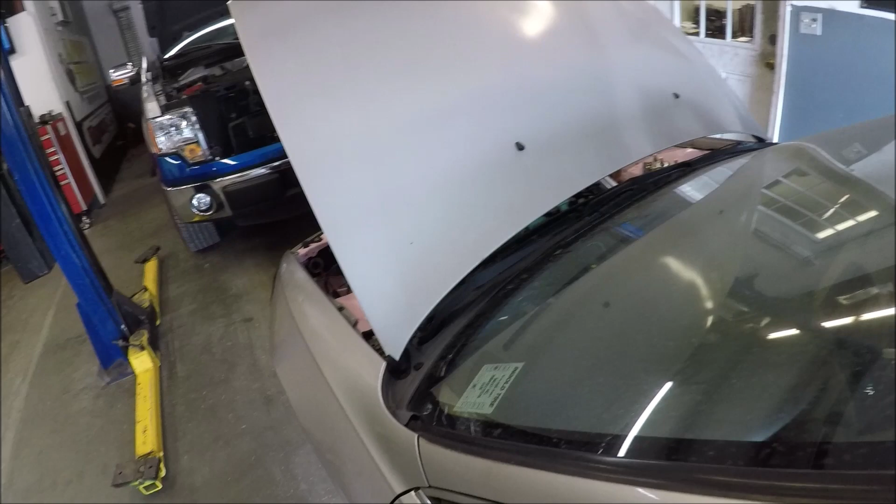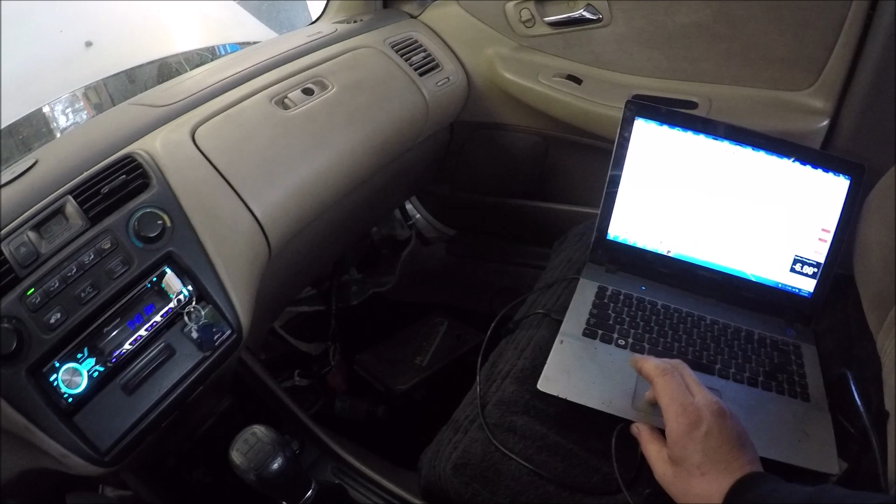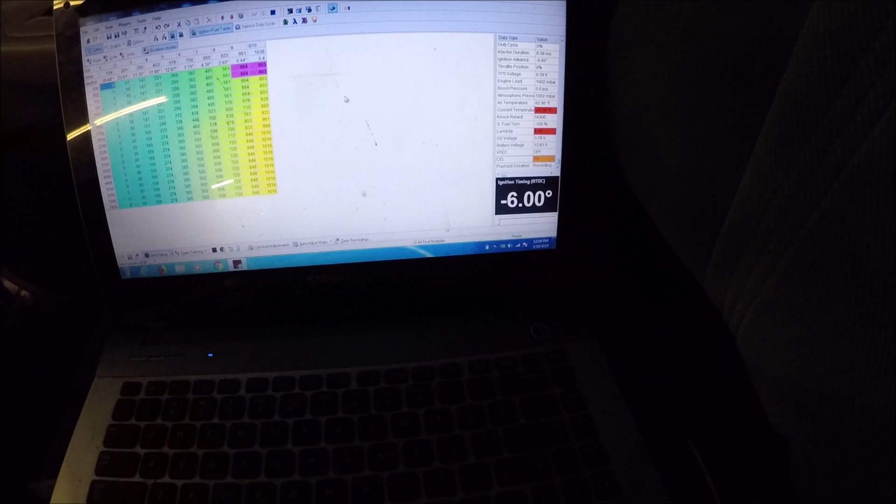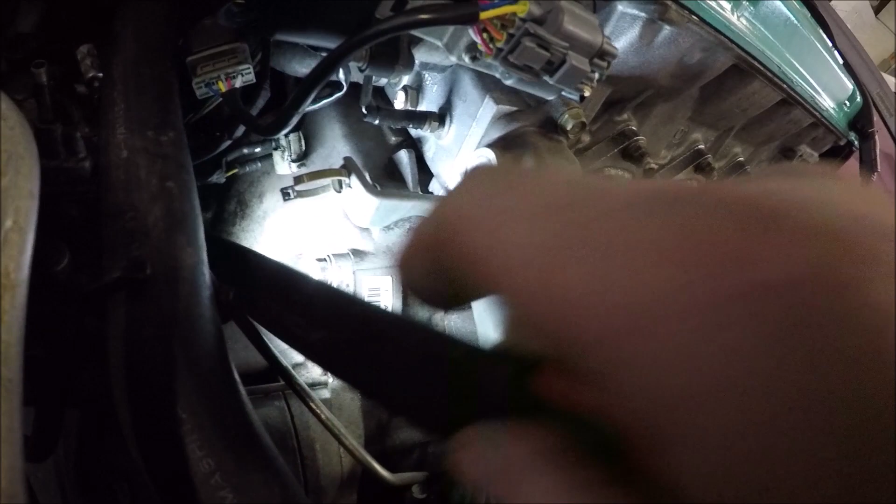Connected. All right, let's see what we have here. Engine coolant temp sensor. Let's go see what we got going on. I don't like hatches. I don't like the color, but I like the car itself. Flashlight. Get down in there. That would be our engine coolant temp sensor plug hanging right here, and that would be a broken engine coolant temperature sensor right there.

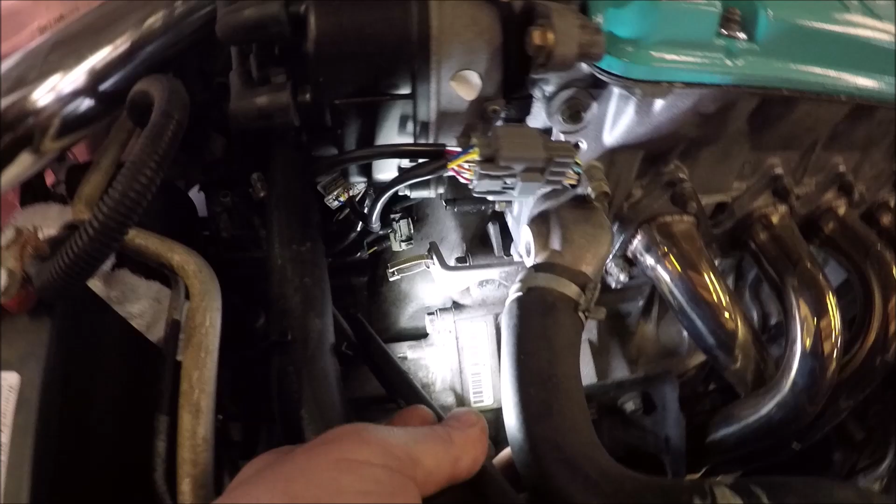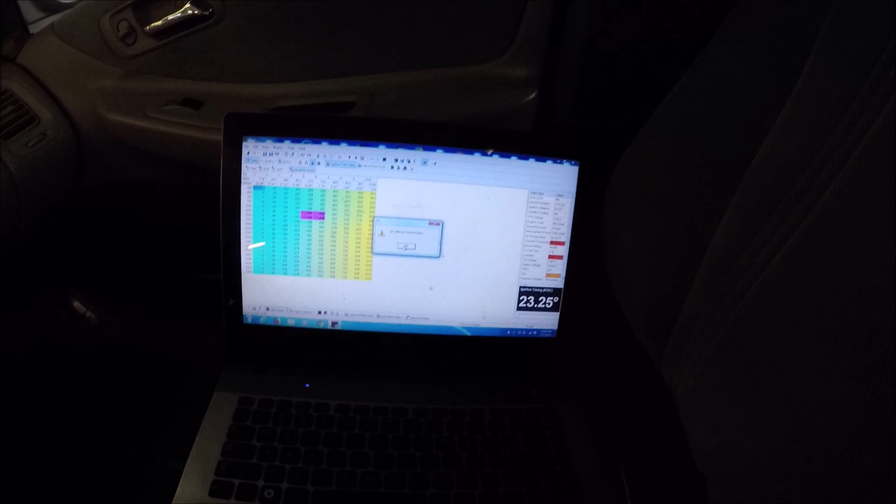Dang! All right, we gotta get this resolved before we can do any tuning, because there's no tuning solution for that. We need that sensor. That's why it runs like doo-doo. All right, so we got the ECT replaced, and now I got an idle air control valve code. It's because the one on the engine is 3-wire, and the P28 it's running on is looking for a 2-wire, so that's just not going to work. We're going to disable that and just roll with it. We'll be back.

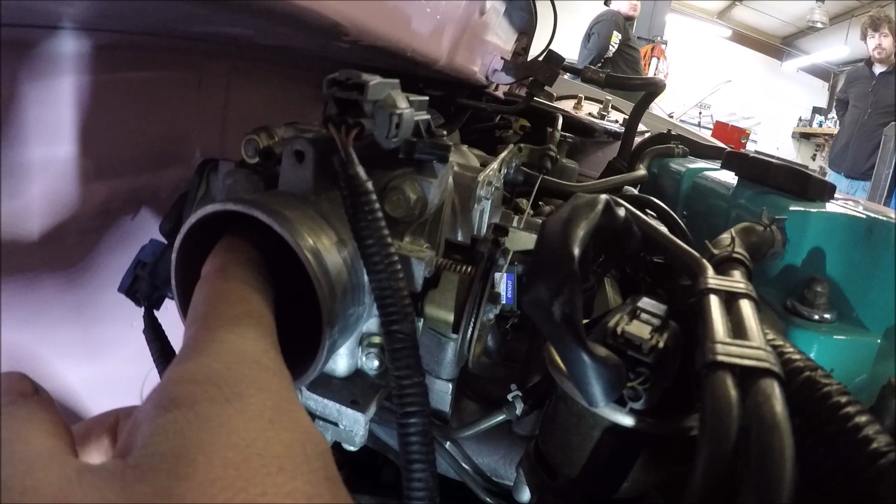Well, got the idle disabled, but we're gonna have to manually block off the idle air control valve or we'll never get rid of this. It's got an internal vacuum leak from where it's hung open, I guess. No more engine light though. See if we can't figure out this vacuum leak. Needs a tune.

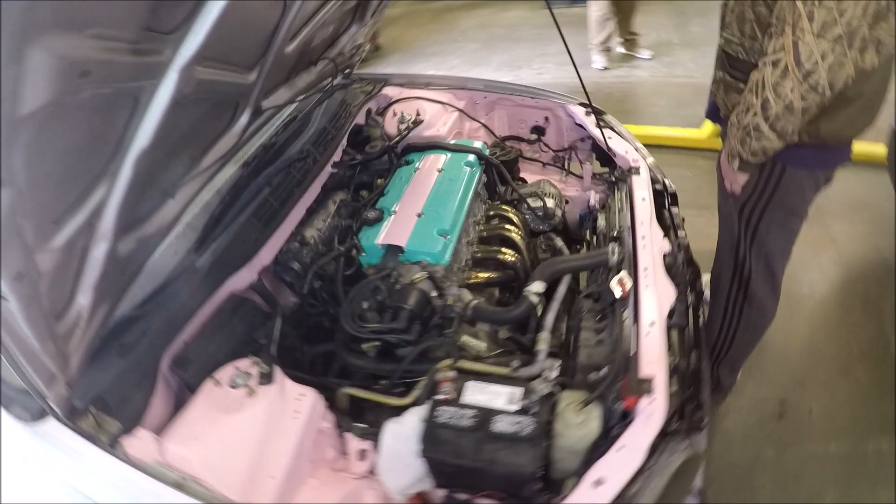Alright guys, like I said, this is not a tuning problem, this is a mechanical problem. There's no way to get through this with tuning and the push of buttons. What we have is an internal vacuum leak. The idle air control valve, which is back here, is leaking. It's stuck open. It's not wired correctly for this car. It won't wire correctly for this car right now. It's not really my job. I'm gonna tune it, so I'm gonna block it off with the gasket I made.

So the idle air control valve can't get air past the throttle plate, because that's what's giving us our leak. So we're gonna slide this gasket over it. I'm gonna clean it all up before I put it together, but that's pretty much the goal right there. We can bolt that on and our idle air control valve will not cause an internal leak anymore. I'll have to manually idle it up with the throttle plate. That's just what we're going to get in this case, so I can move forward and just get my job done.

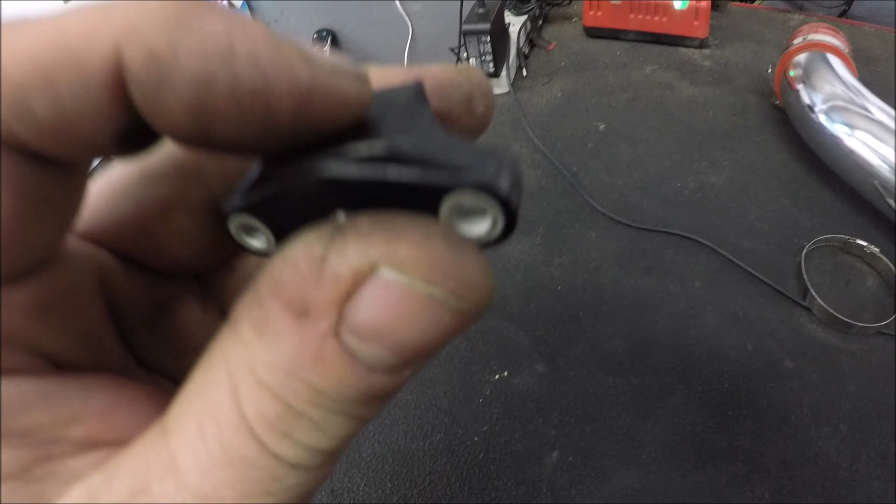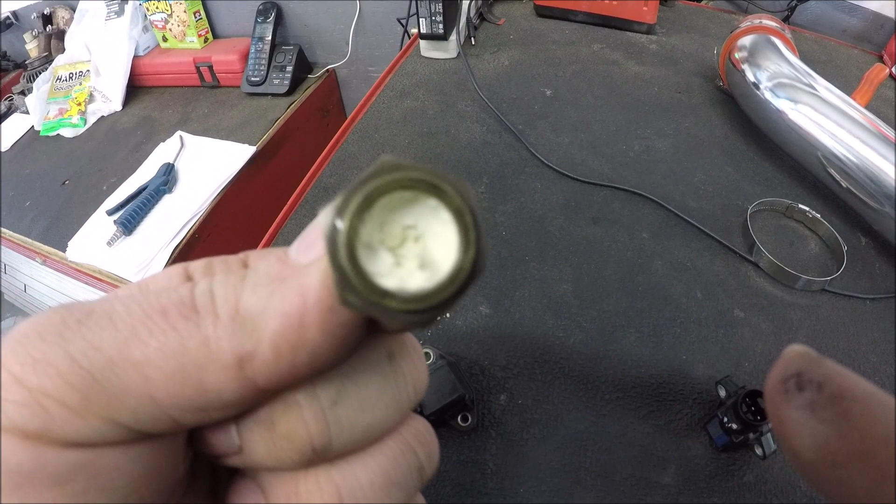Let's go. Alright, before installing the throttle body back on, I noticed the MAP sensor was cracked. Probably from the motor shipping, hitting it. Ain't no telling. She worked, but we're going to go ahead and resolve that with another good used one. Here's that ECT sensor that was in there to begin with. Broke clean off. All again from probably the motor shipping. But we're taking care of it and we'll be back when she's done.

Alright, so we're back together. I'm going to leave the intake tube off till I know we get it adjusted right, because we're probably going to manually have to idle it up. I haven't done so yet. Slight chance we don't have to do anything. I guarantee it won't idle. Foot on the gas.

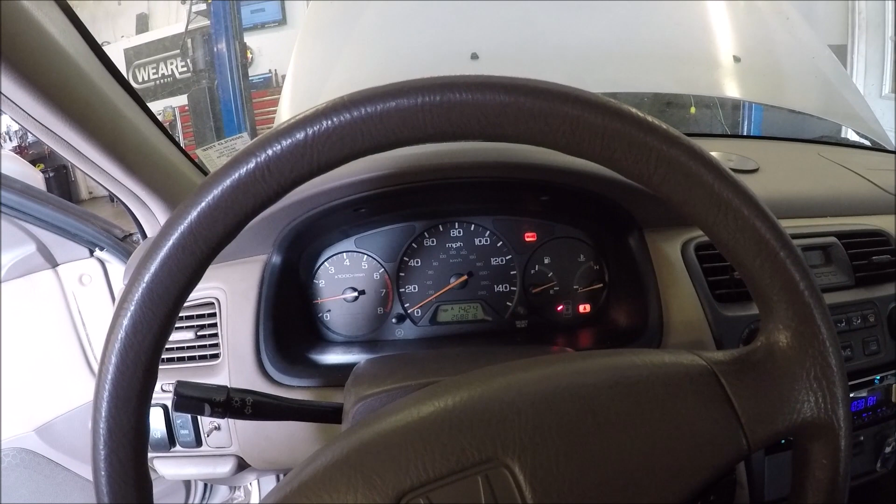That's me keeping it alive with my foot being steady on the throttle. So what we're going to do is just idle it up, set our TPS parameters to 0 and go from there. We'll move forward with the tune. They just won't have no idle air control functionality, but I'll be able to get the fuel and timing curves correct and we can move forward and be done.

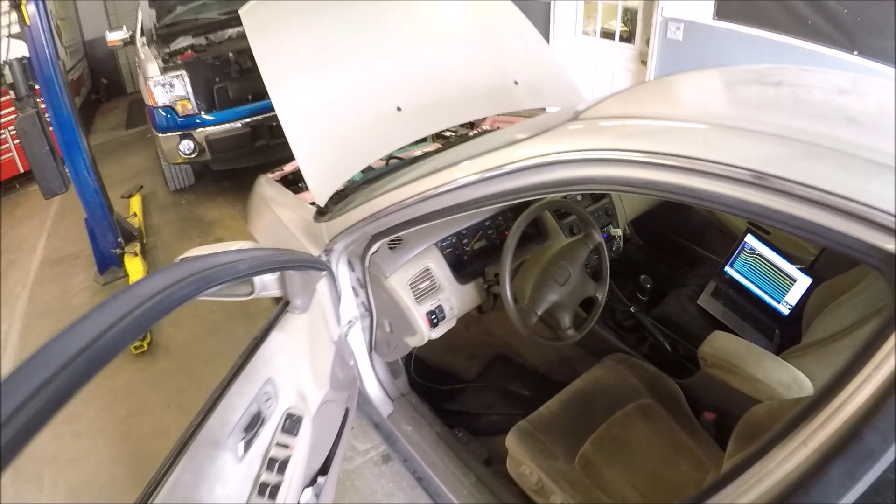We got our idle right where we want her. Let me get it with my hand down here. Look, she idles correctly, no engine light, responds like she should, returns the idle like it should. Now this is what a car that just needs a tune runs like. Now we just need a tune, minus the fact that we got to put part of the exhaust on.

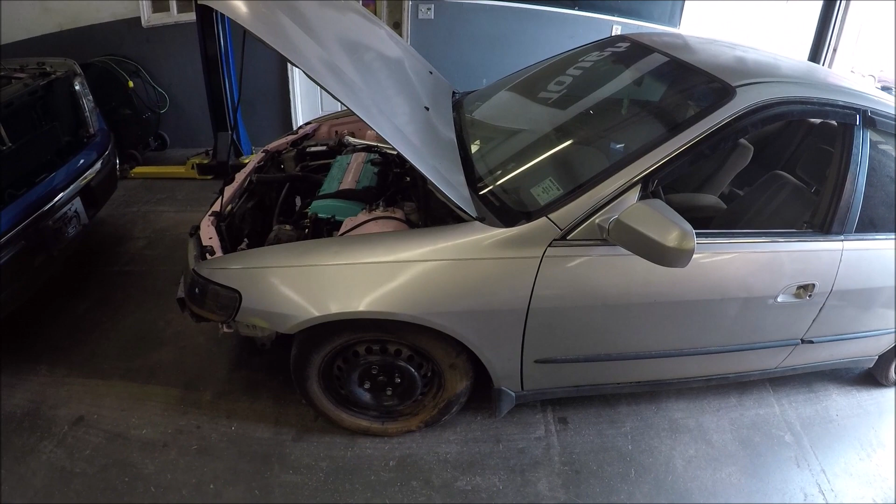Gonna help Anthony out here and get the exhaust on. Well, we already helped him out. I don't think he knew he had those issues, but we got to weld part of the exhaust, get it bolted up, and she's ready for a tune.

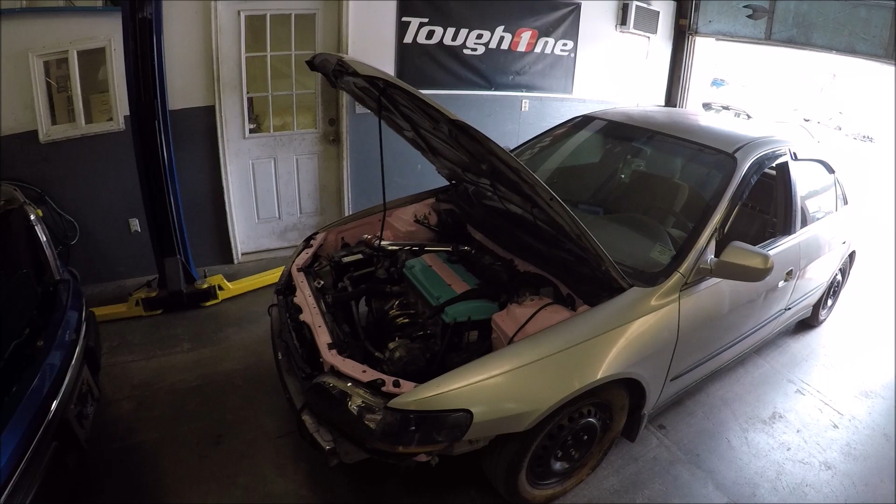But it's Sunday. I had to meet a customer up here, so I just used my time wisely while I was waiting on him and dealing with him. I've stayed over a little bit. He's come and gone, but I'm gonna utilize the rest of my Sunday for my time. So I'm gonna go home and return to this next week. We'll be back with it. Glad it's running much better though.

Monday morning, come in. I thought it was going to be a bolt-in ordeal on the exhaust, but had to weld her up. Quiet now. Idling good, no engine lights. Just gonna watch it, make sure the fans come and go like they're supposed to, and it don't overheat.

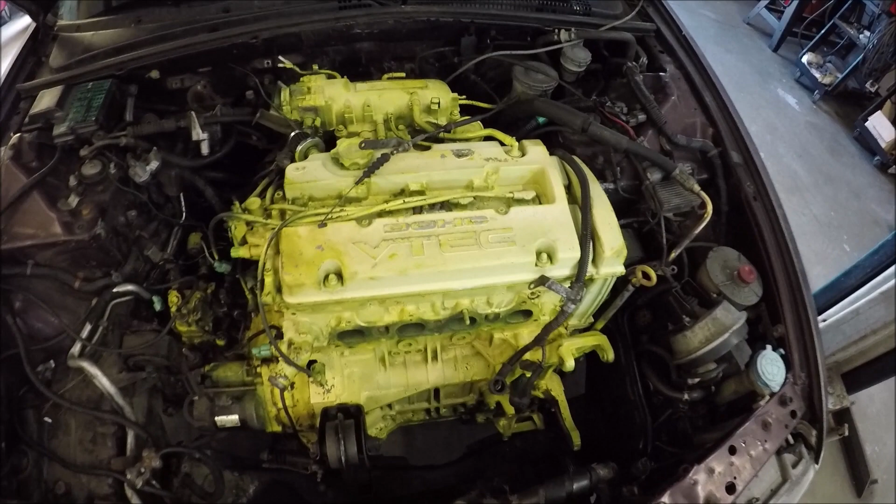Greg bought a new whip. Yeah. Y'all ain't ready for what's under the hood of this joint. This is the pride and joy. For all y'all Accord people, y'all know y'all wish y'all had this swap. Damn! That shit's hot. $500. For the hood prop.

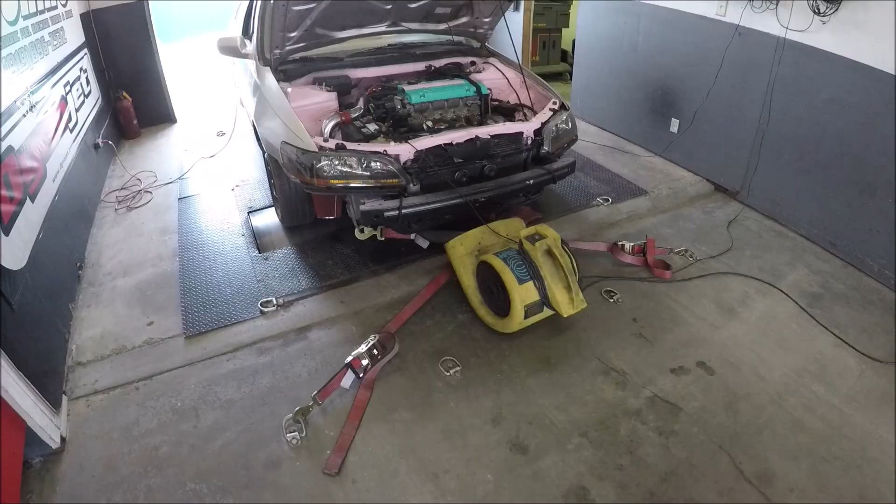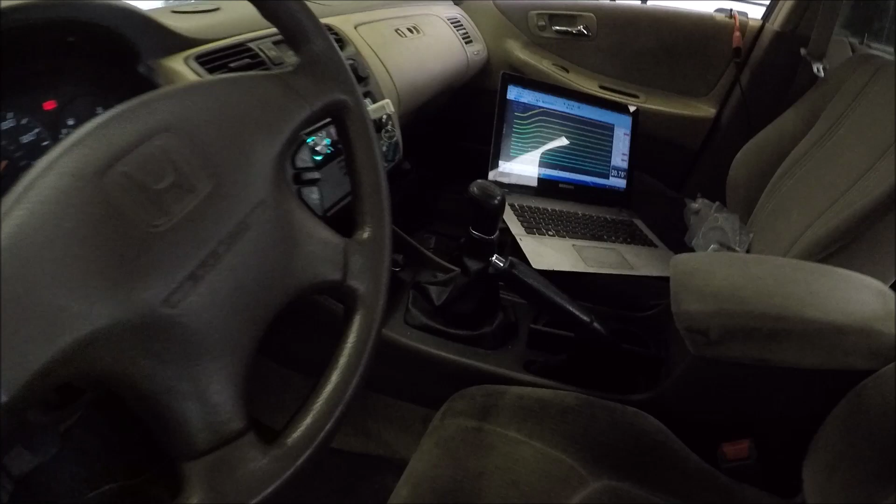Got Anthony up and running before I go get my youngin for school today. It's Monday afternoon now. Got her strapped down, idling good, no check engine lights, wide bands in. Let's give her a run through the gears to make sure everything's still sound. Haven't done that yet. Air fuels seem to be about 15 at idle.

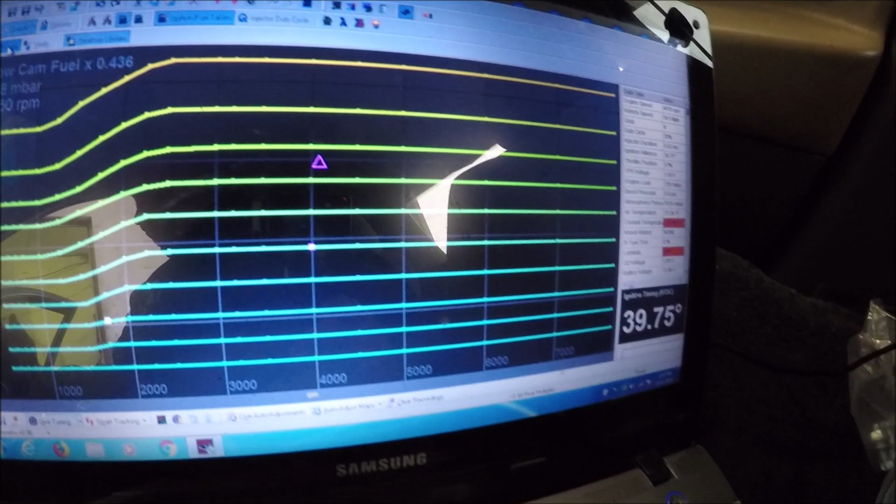Everything seems sound. Just get some heat in her before I go pick my youngin up down the road from school, and we'll come back and start tuning this thing.

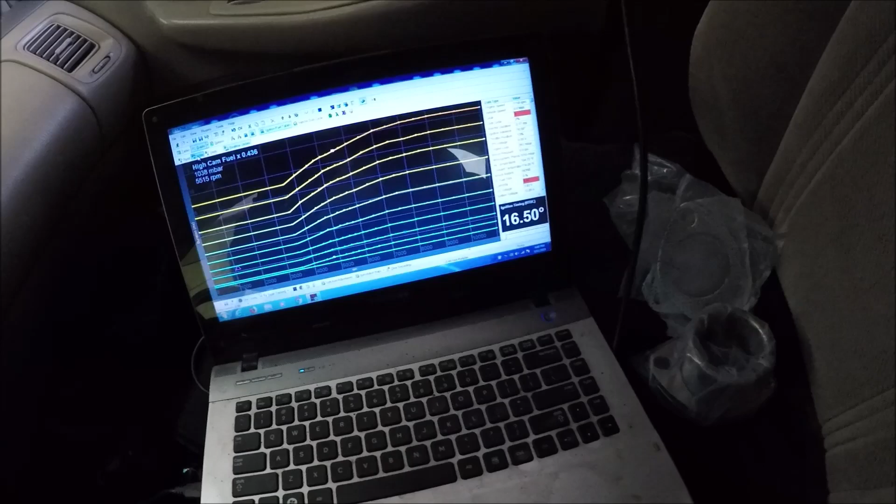And we're back with the 98 Accord with the pink engine bay. All right, think we're ready for a base pull. Let's get it cracking. Laid into it a little bit a minute ago. We are doing second gear pull on this thing first. It's got the Accord transmission with a F20B swap, and these gears are just so long. I'm gonna do the first pull in second. It'll get us a good idea where we need to be air fuel wise. And no, it's not 1-to-1. I'll save that for later.

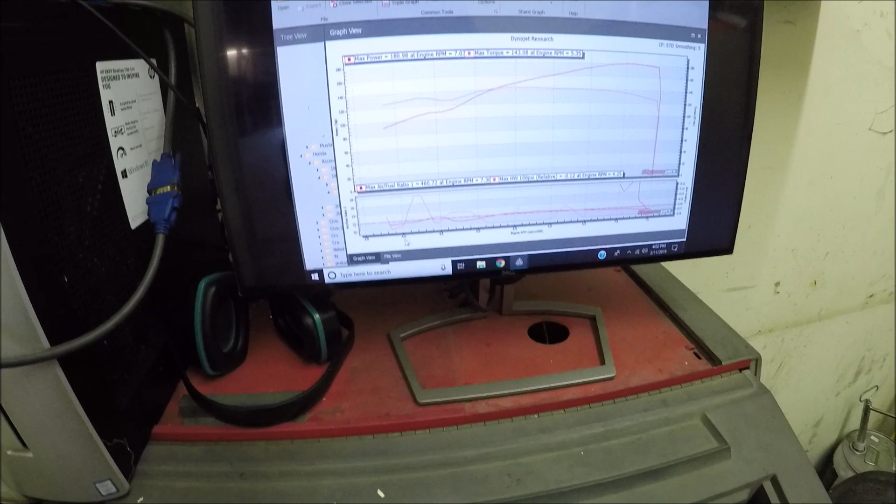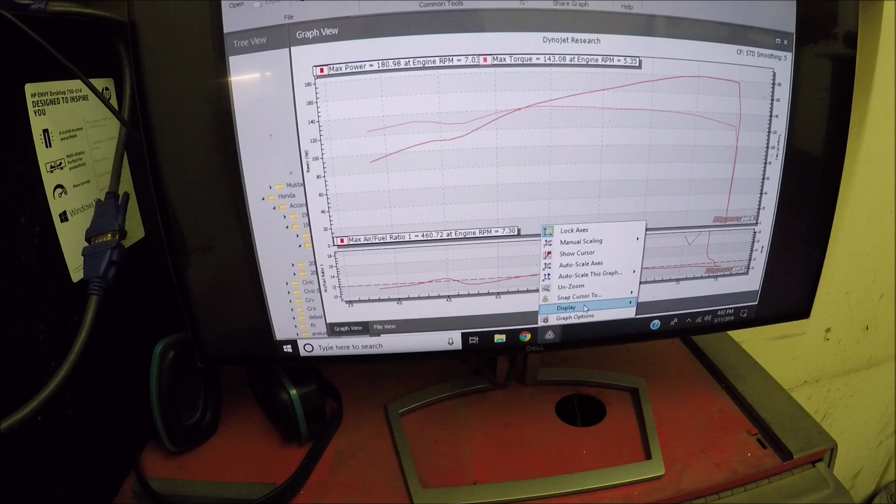Bit rich it appeared. See what we got. Ooh, 180. Air fuels were better than I assumed. Well, no, they were rich. That dotted line represents 12 air fuels. So we were rich all the way across. Bam! There we go. Get these air fuels right. Timing's where they normally like it. Looks like I need to set VTEC a little lower and lean it out. We'll be back.

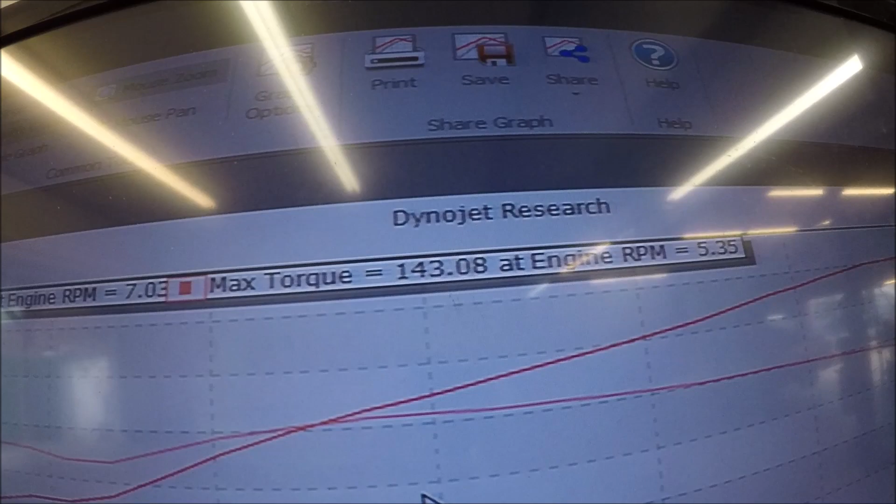Good first base pull. Just so you know, because I didn't mention it, 180 horsepower to the wheels and 143 for torque. And we are working with the F20B swap bolted to a factory LX Accord transmission. Not the best suited thing for it.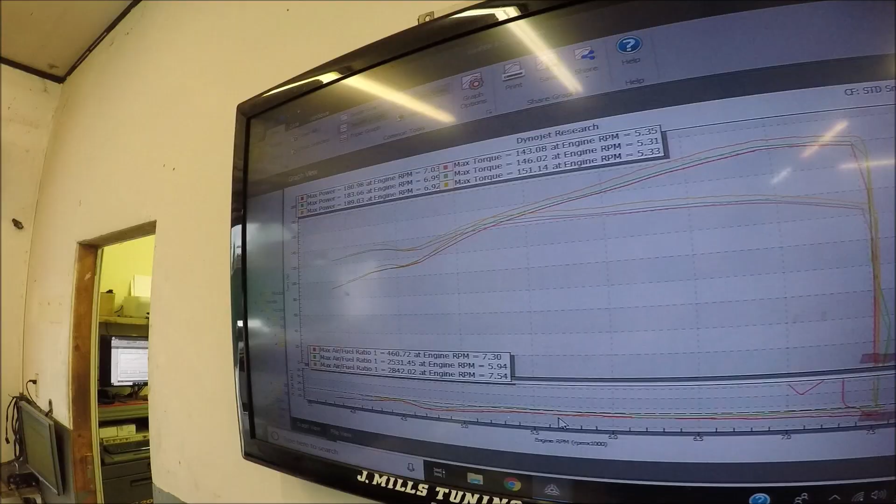All right, I think we're pretty much done here. I'm gonna go over part throttle, but I don't think that's anything y'all want to watch. We started with 180 for power, 143 for torque, and we ended up with 189 for power, 151 for torque. Not so bad with a little F20B bolted to a stock Accord transmission that's long geared as hell. Can't be mad at it.

That'll wrap this up. We're waiting for Dale to come pick it up. I'll leave it strapped on. Maybe he can get some video footage while it's still strapped down. But for now, she's done.

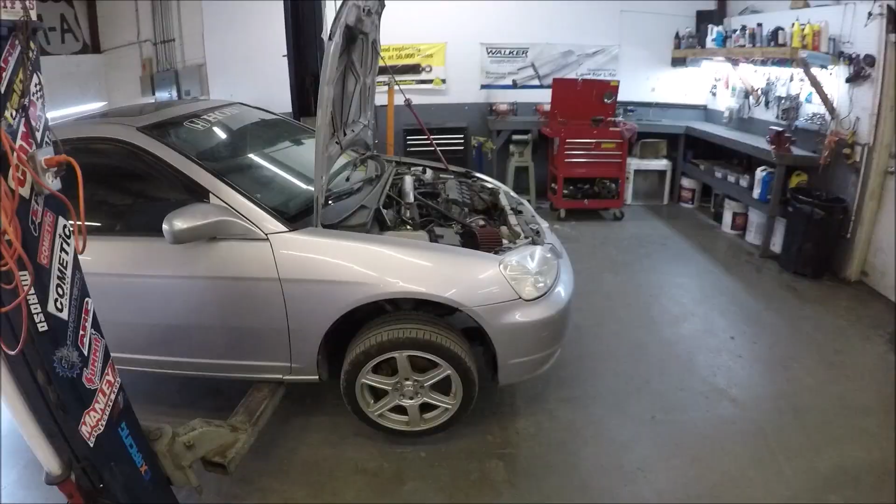Let's show you some of what's been going on around the shop. This just got pulled in today. Was dropped off sometime last week. Hasn't been driven in a while, hence the spider webs everywhere.

Who that guy? Who that?

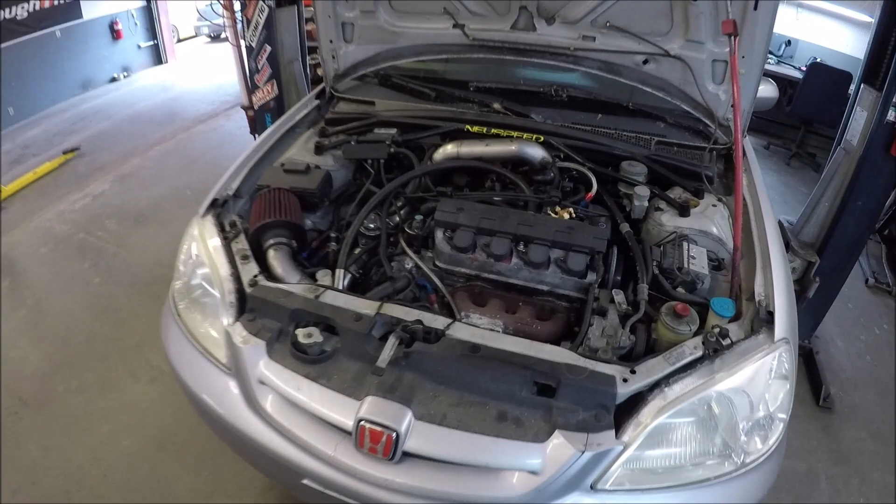Well, this turd, she blew up, rod knock, still runs and drives, just sounds really bad. So customer paid a deposit today for some parts. We're gonna build an engine for him, so you can have that little bitty motor that won't blow up. But no big power maker there. We'll tune that one on K-Pro when she's done.

Just got Anthony done, of course. This Mazdaspeed out here got dropped off, blown up motor replacement. The FRS, high pressure fuel pump, and the yellow S2000 out there. Y'all are used to that thing, but she's back, never left.

I broke the transmission on a test drive. We must have scrapped it already. I'm gonna show it to you. But customer came to pick it up. That's the turbo one, tuned on pump gas, made right at under 500.

Well, she broke the transmission on the test drive with the customer in the car, and now we're putting a Nissan 370Z transmission in it. So we're doing the swap with the Inline Pro parts. But it's gonna be it. I'm gonna wait for Dale to get here, and after he picks up, I'm going home.

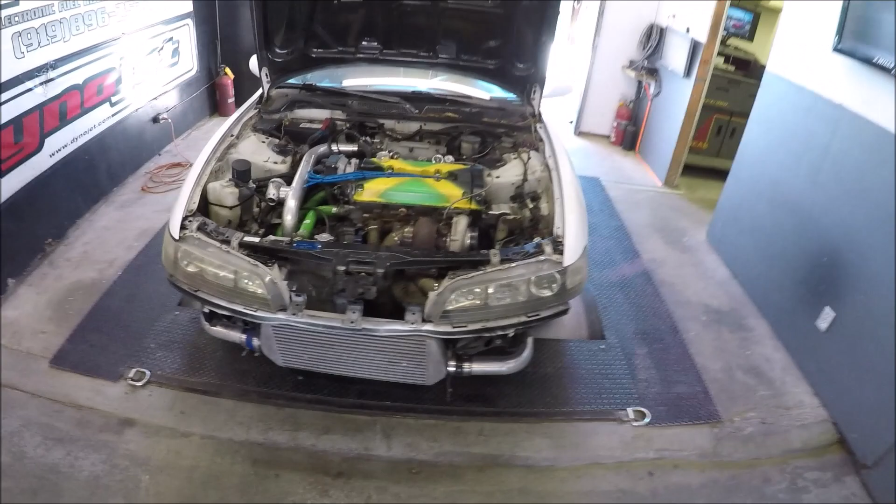Got this 95 Integra in with an LS-VTEC, stock sleeves. See what we can do on pump gas. Looking for the mid to high 400s. See what we can get. Strap her down. She's unstrapped right now. Let's get her strapped and loaded.

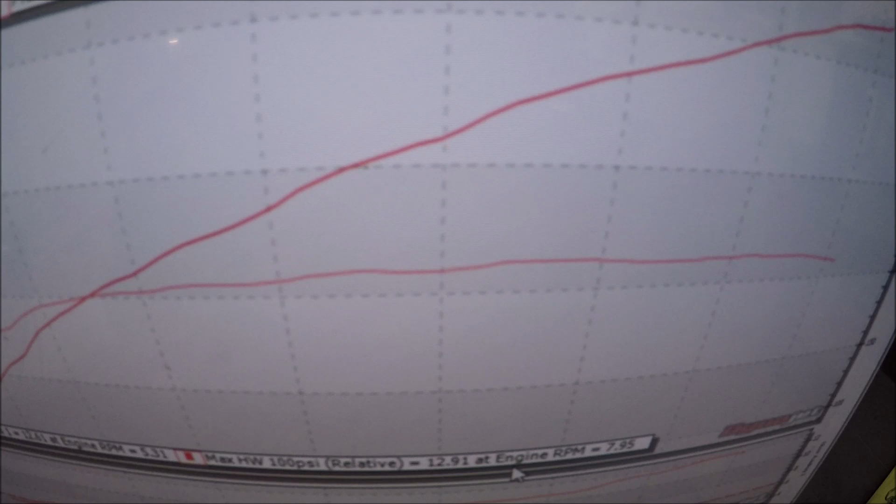Alrighty, here is our base pull. Base pull, 320 horsepower, 212 foot-pounds of torque. Nice clean graph. Air fuels are good. We turned the boost controller on this time. I'm gonna give her a go with the boost turned up. See what happens. I don't know what it's gonna hit.

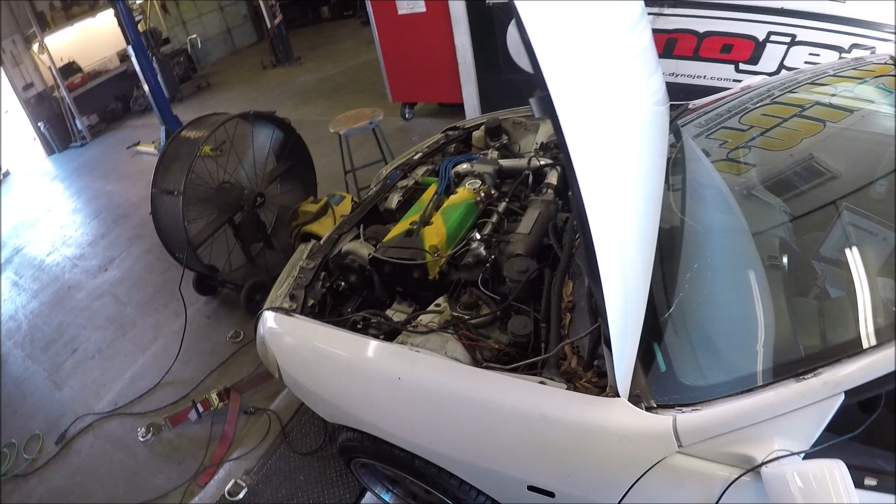Got it on 35% duty cycle. Don't even know if it's wired right, so we'll find out a lot on this pull. Is the boost controller wired properly? Is it going to work properly? We'll see.

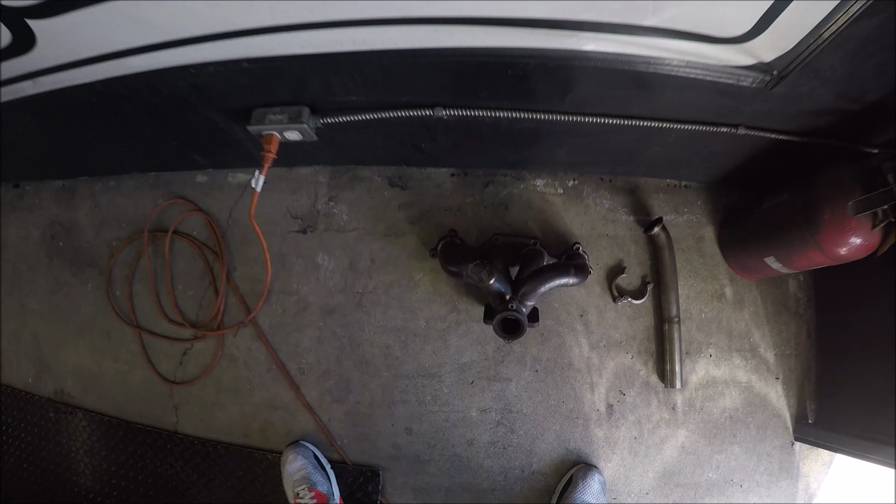Making some jam. Boost controller worked. Little recap on this thing that I didn't tell y'all earlier. It originally came in yesterday, Saturday, for a tune. Today's Sunday. It had this CP mini ram on it, or short ram. Put this in the light. That's what we were working with. We had lots of boost creep, really uncontrollable. Today, we still have some boost creep.

We swapped it out for the customer's top mount he had. He just wasn't prepared to do a down pipe and fix the charge piping for it, but I got that going yesterday afternoon. We still have some creep. Not as bad as yesterday. We can actually tune this. We're gonna live with it. We're just gonna roll with it.

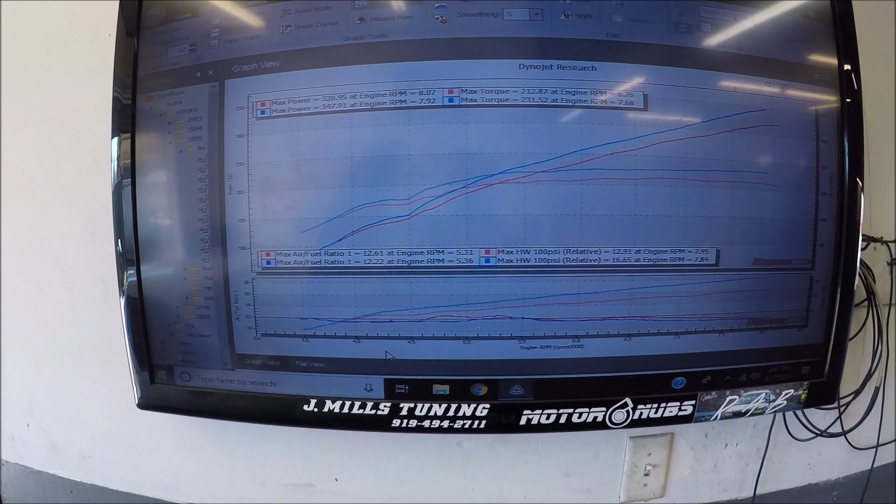Just a couple things that I think might be suspect. You could have a leak from the blow-off valve over there causing boost to not hit full boost as early. There just could be other things going on, but we're gonna roll with it. It's making really good power. It's safe. Air fuels were good.

We're gonna turn the boost up some more and take some fuel out on the big end and turn it more RPMs because it looks like it wants it. See what happens.

We either hit boost cut or lost the charge piping. Something happened, fell on its face. There we go. I'll fix that and be back.

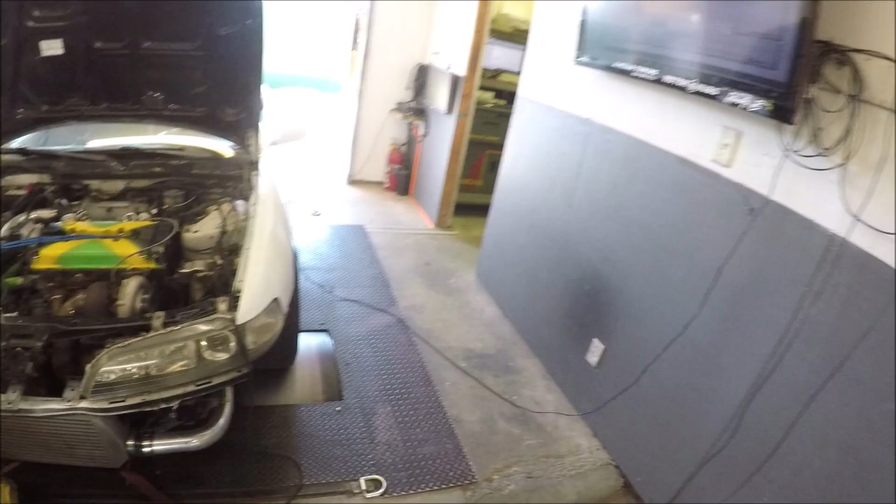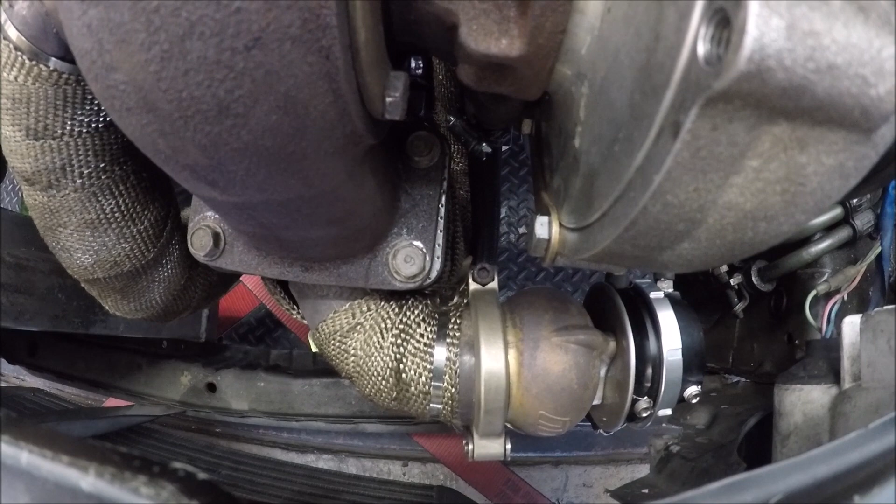Alright, like I said, we went from the CP mini ram to whatever this top mount is. I'm not sure. The mini ram originally had a 2-bolt 38mm gate. Creep was really uncontrollable just on gate pressure. No boost controller even hooked up. I couldn't control it. The more RPMs you give it, the more boost it'd make. This kind of levels off eventually, but gate placement is not the best. As you see, that gate could be placed better.

Why is that 90 there? We have all this room, man, all this room for a gate right here. And over here. Why is this 90 here? Well, in my opinion, this manifold would flow better if there was a piece of pipe angled in there at a 45-degree angle with the gate coming kind of upwards. It'd get some flow into it. Reason I'm saying this, we still have boost creep, and I figured the more the boost went up, the better it would get. It did. It leveled off here finally.

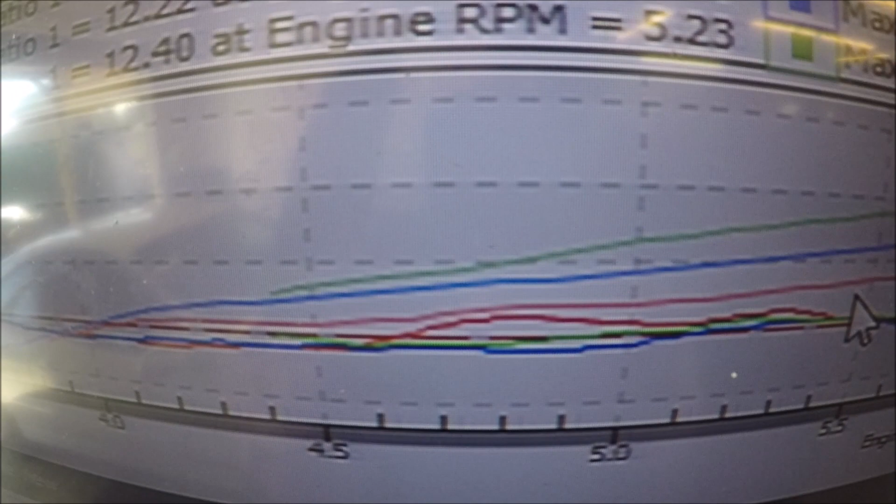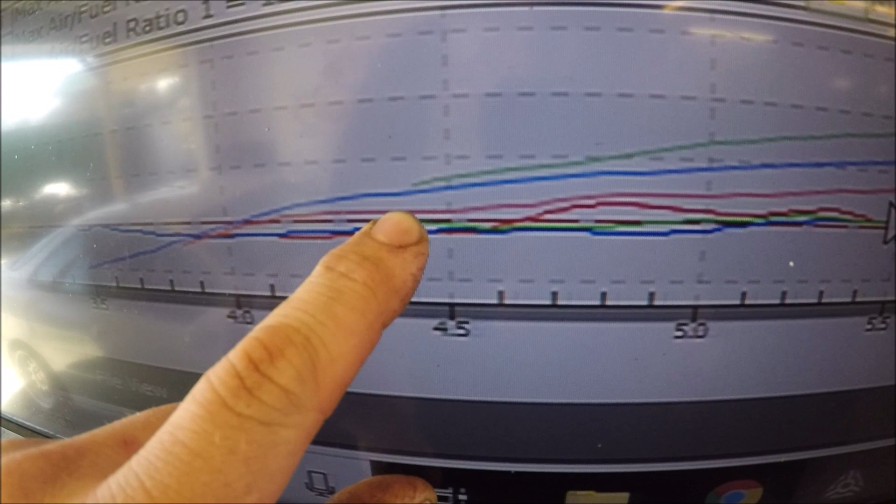It's a 9-pound spring in the gate. 10-pound, 10.5-ish is what I believe it is. Not very positive, but it should be leveling off somewhere around here. You can see on this red graph, it tries to around 10 pounds. That's 10 pounds right here. But it don't level off till 19 here. There's the boost we made that pull.

I will not be going with any more boost on this. We are pump gas, stock sleeves, rod and piston, cam only motor here. Customer did want close to 500, and we only made 376 that pull to the tire with 252 torque.

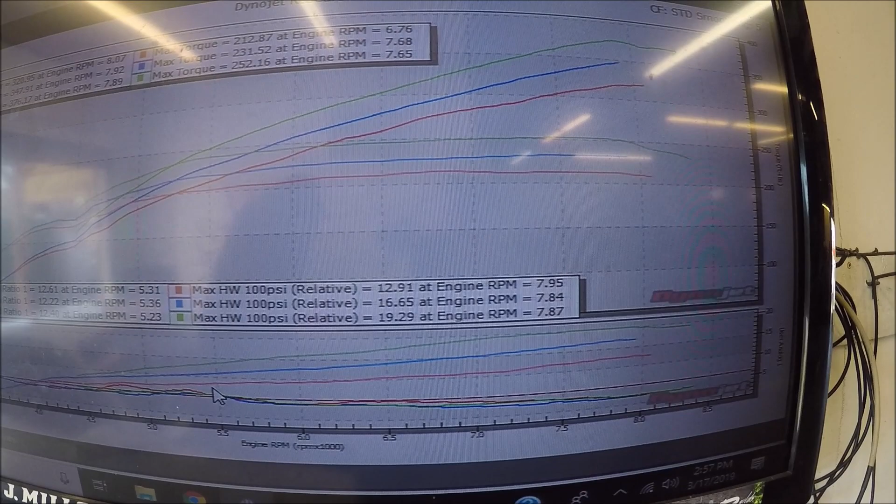You can't always get what the customer wants. The downfall of my job. Now here I gotta be the bad guy. That's what it feels like anyway. In my shoes, you feel like the bad guy. Here I am, I tried to help Cuz with his boost creep. It didn't resolve it all the way. We just went from one, I wouldn't say crappy manifold, but not suited for the setup, to another manifold not suited for the setup or for what the customer wants here.

This thing can be fixed, and I would roll with it, and I think there's other things playing a factor in it. But if it were my car, I would either add another 44mm gate or try to position that one better, or just add a 60mm gate and be done. But here's why I say I believe there's other things adding to it. There's 2.5-inch exhaust coming off of it. That goes all the way back, full exhaust. That's hurting us here. It's hurting the power, it's hurting the boost. The turbo would just respond better without all that back pressure.

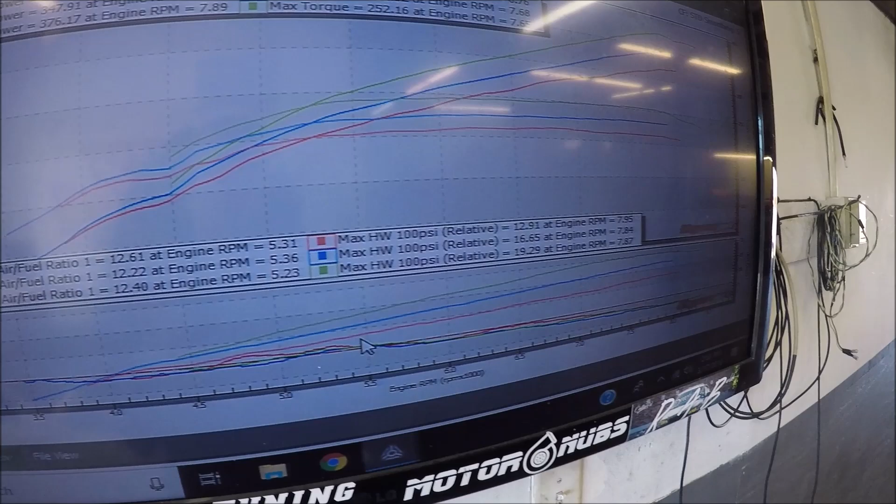But it went rich on the top of that pull. I'm gonna attempt to pull that out. I'm gonna give it another shot or two, get a little leaner up there, but that's as far as we're going. We might make a little better number just because I lean it out a little bit on the big end, but I don't intend to go no more boost. Don't want to kill it. It's already past its limits. If the customer wants more power, he's just gonna have to get rid of that little entry-level turbo right there. Honestly, need something bigger on there.

But there's boost creep issues to tend to, but this will get them going. It's a good start. You could actually leave it like this as long as the boost creep wasn't too bad on the road. We'll be setting up boost by gear, so that'll help it stay alive a lot longer. We won't be putting 19 pounds to every gear. I'll probably just leave that to fourth, maybe third too. We'll see.

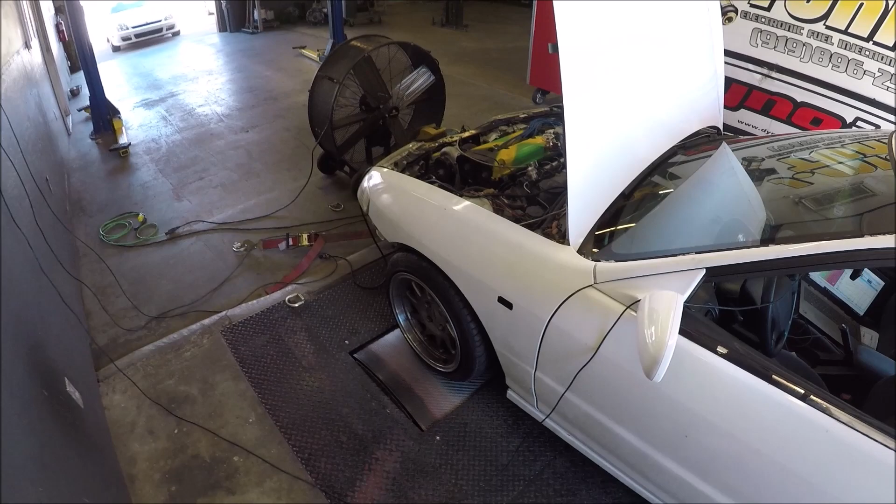Who the hell calls this shop on a Sunday? Ninjas. Let's see who this is. Who this? Call from N Carolina. I ain't answering that on a Sunday.

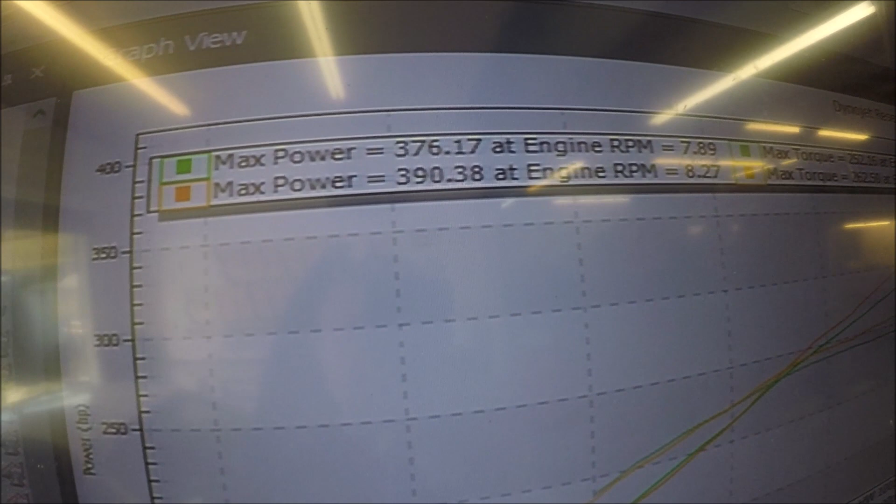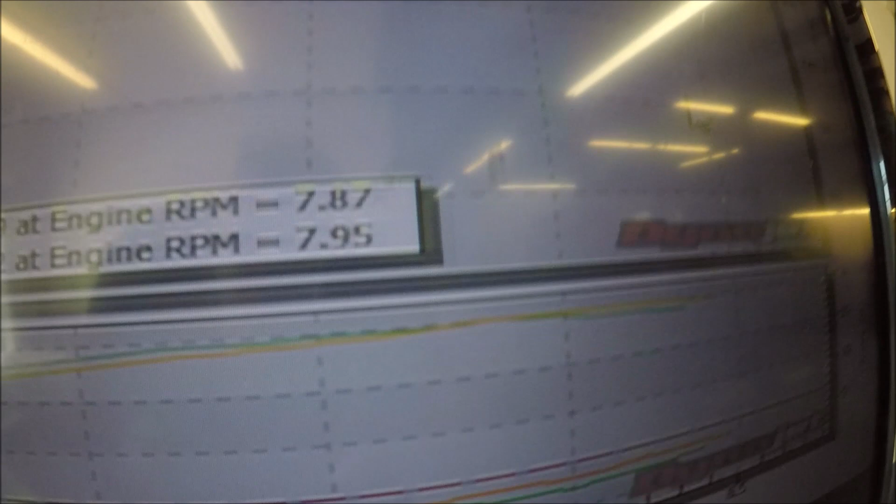Not what the customer exactly wanted, but that's where I'm forced to stop. Not trying to blow somebody's shit up on my watch. But 390 is what we got for power to the wheel, 262 for torque. Got a little more jam there, little leaner on the big end. It's about 11.8. That's what it shows there. That's what I want to have with that much boost on stock sleeves.

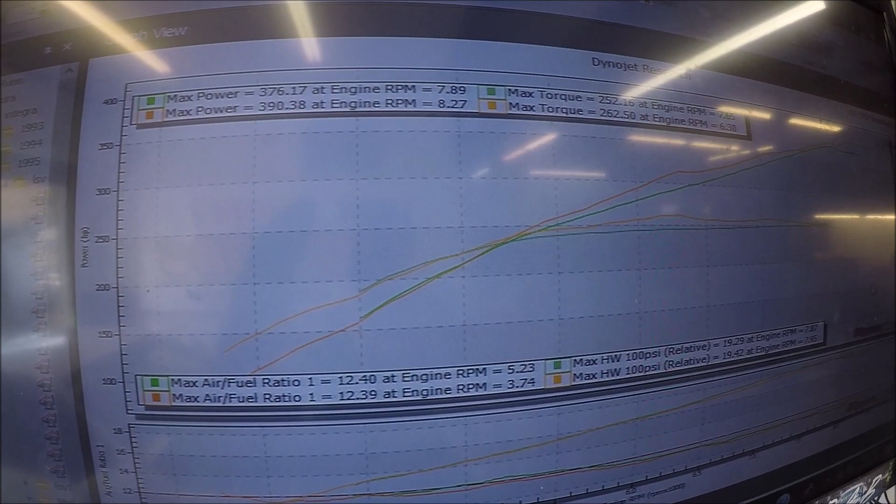That entry-level Precision needs to go bye-bye. We need a big boy to make the power he wants, and some E85 in the tank, honestly, for them stock sleeves. But that's where we're gonna roll. I just gotta set up boost by gear, so you might catch another pull with me strolling through the gears once that's done. But that's where we're at. I didn't do anything different but take fuel out, add an extra strap across there, and put some sauce on the tires because I suspected a little spin at the top, and I think that was the case.

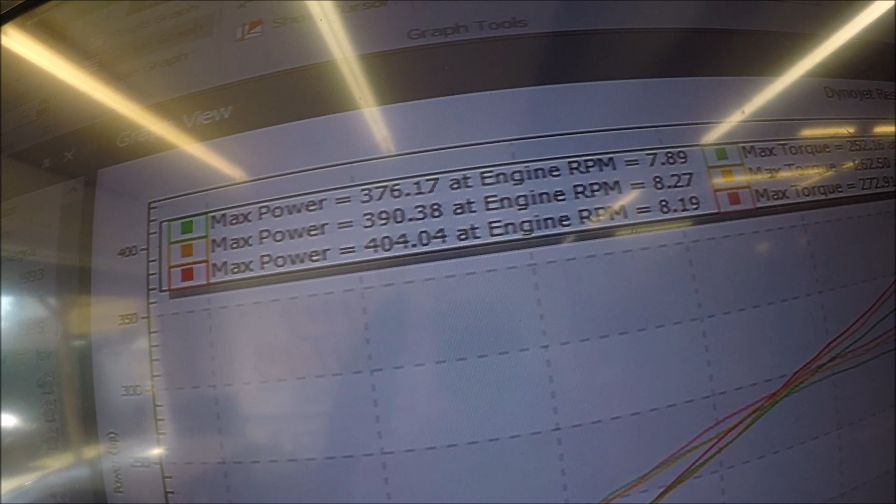I lied. Car cooled off, so I wanted to do a pull while it was cold, and we broke that 400 mark. Quite a ways away from the 500 mark, but what can you do? 272 foot-pounds of torque, 404 horsepower. Car made the same boost. Well, if you look right there, just a tick more. Cooled off.

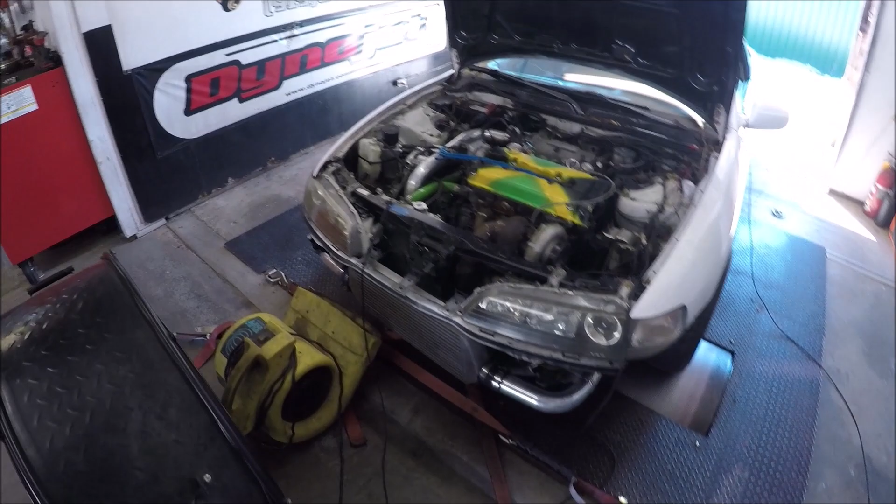Making updates to the car, setting up boost by gear, and the fucking phone's ringing again on a Sunday. Whose man's is this? Carolina. Again, not gonna answer. I'm just gonna wonder who that be. It's Sunday. I'm supposed to be home with my family. Instead, my son is YouTubing it up. What's up, doodle butt? And my wife's at home on the couch, and I'm at work. And these motherfuckers want to call, trying to bug me. Let me just shut up.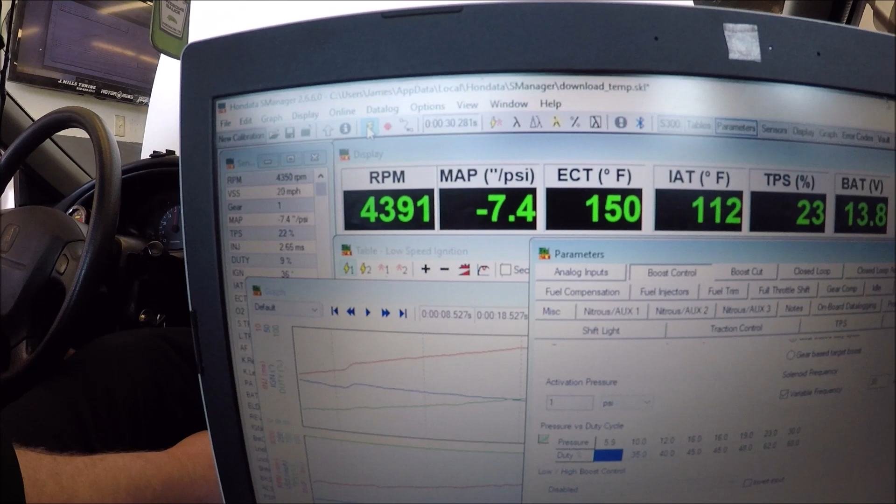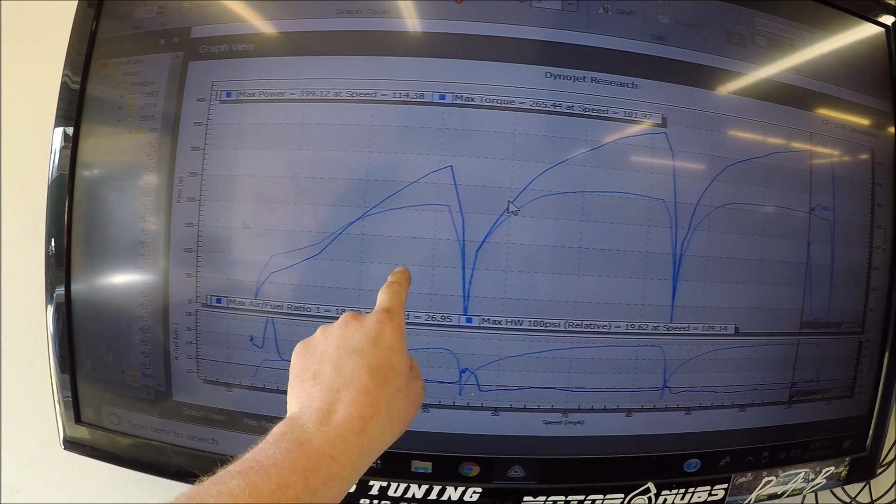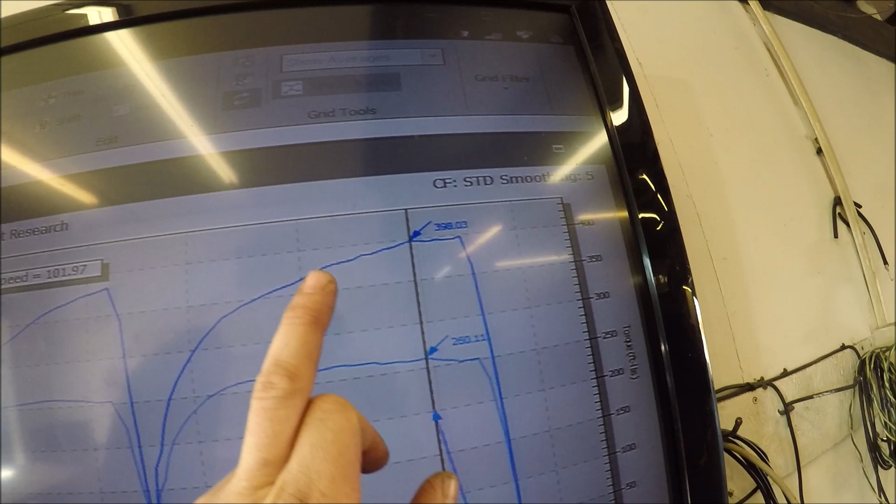Let's finish this. Boost by gear. Here's our boost by gear runs. Second gear, can't do first on the dyno, just blow the tires off. Second gear, third gear, fourth gear. That's 13 pounds, 18 pounds, 20 pounds. But yeah, 398. It's like 370, well, it's like 290. But that's it. You just gotta go over part throttle and unstrap it, and me and this little fuckhead can go hang out.

Little doodle head dummy.